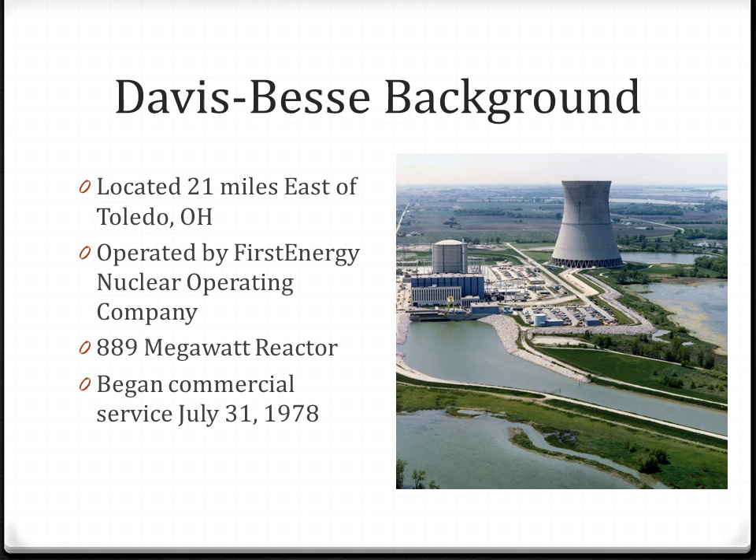Davis-Besse discovered borated primary water had leaked through stress corrosion cracks in the wall of an A600 nozzle. They also discovered boric acid wastage on top of the reactor vessel head. Approximately 900 pounds of boric acid residue had leaked out and resided on top of the head. Corrosion had already occurred through 6.5 inches of steel, and only a third of an inch of stainless steel cladding remained as a pressure boundary, keeping 2,100 psi reactor coolant from leaking out of the reactor vessel. The stainless steel cladding did exhibit plastic deformation in the form of a 1/8 inch bulge.

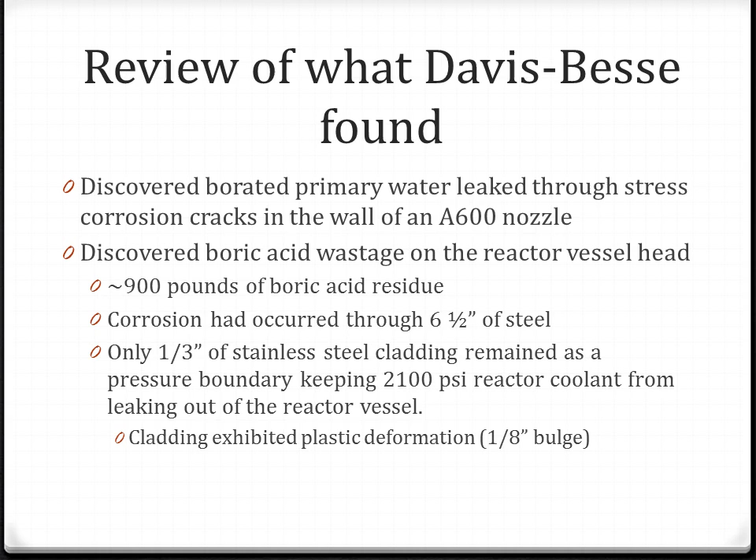The damage at Davis-Besse can be traced back to the cracks in the nozzle caused by stress corrosion cracking of the Inconel A600 nozzle. The crack initiation began around 1990, and the leakage from the nozzle began around 1995. The cracks allowed borated primary water to leak through the cracks and come in contact with the low alloy steel reactor vessel head. The boric acid wastage of the low alloy steel led to the creation of a large cavity approximately 6.5 inches deep and 5 inches wide in the reactor vessel head.

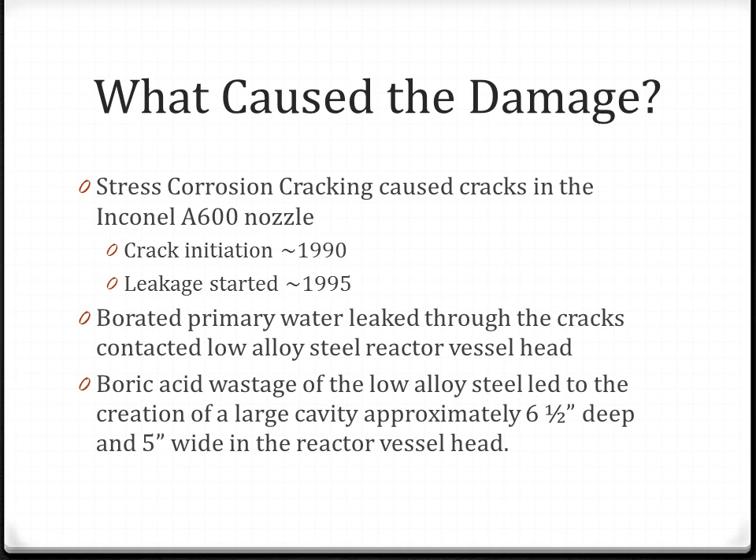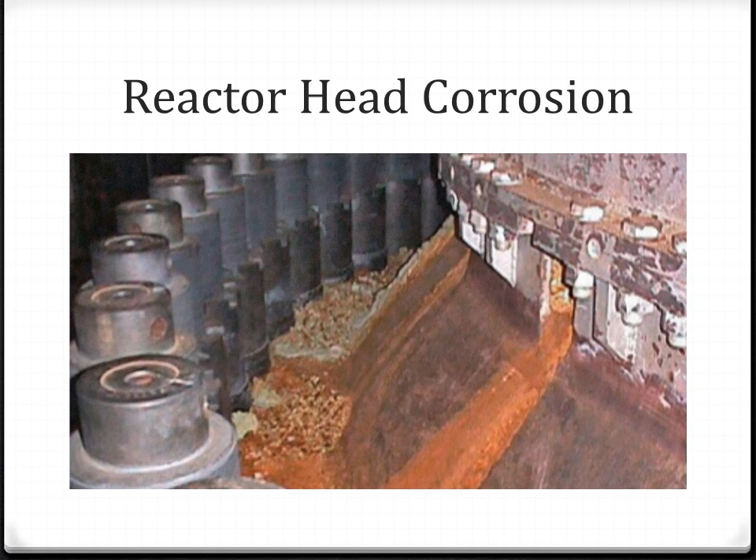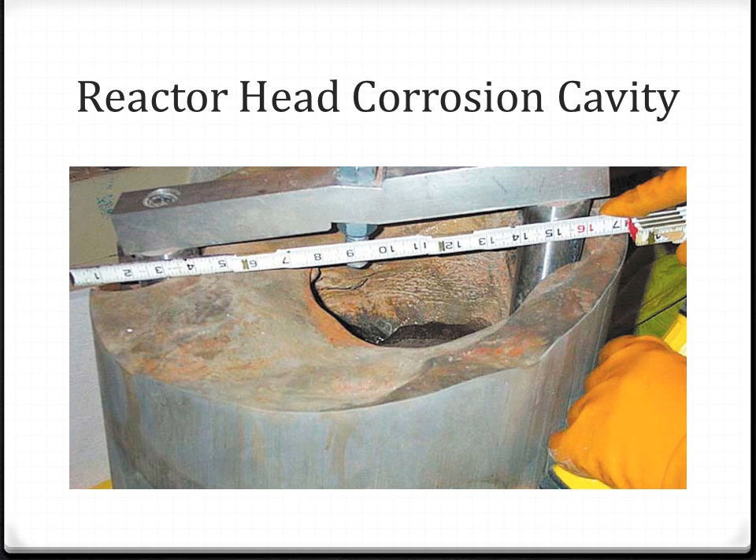This is a view of the top of the reactor vessel head at Davis-Besse. In this picture you can see the boric acid deposits and corrosion on top of the reactor vessel head. This is a picture of a 17-inch diameter section removed from the Davis-Besse reactor vessel head, showing the boric acid wastage around nozzle 3 toward nozzle 11.

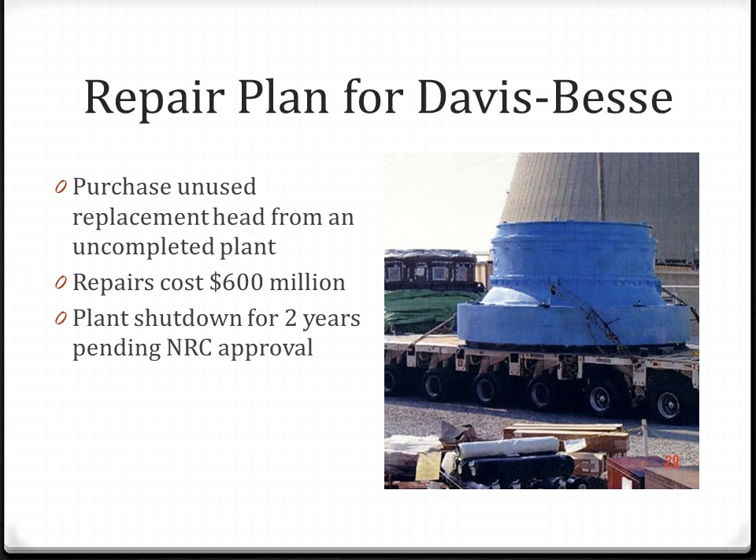Davis-Besse was left with no other option but to replace the damaged reactor vessel head. The plant had to purchase a replacement head from Midland, an uncompleted reactor plant. The total cost of the repairs added up to $600 million, and the plant was shut down for 2 years pending approval from the Nuclear Regulatory Commission. Although the repairs did not take 2 years, Davis-Besse had to prove that they could operate the plant safely.

Could Davis-Besse have prevented this incident? First off, these were good engineers, doing the best that they could with the information they had at hand. Although this incident shares a lot of the same factors that led to the devastating Challenger disaster in 1986, the engineers at Davis-Besse did not have nearly as much information as the personnel at NASA had.

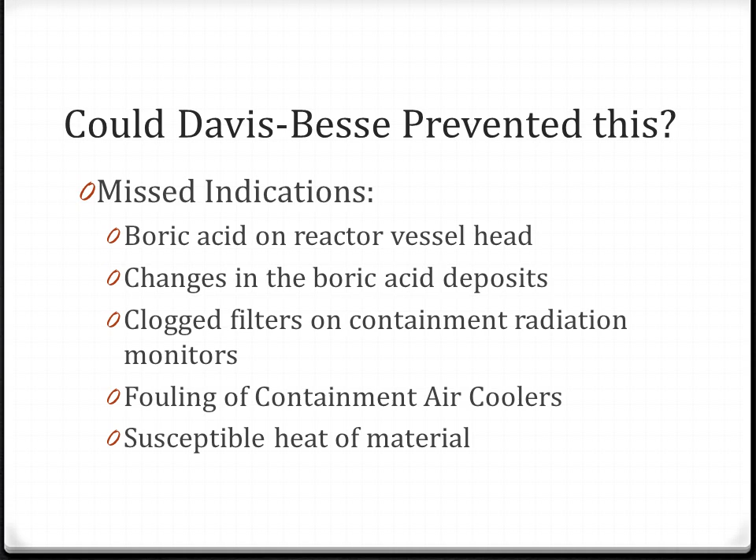The engineers did miss indications such as the amount of boric acid on the reactor vessel head, the changes in the boric acid deposits, the frequency at which containment radiation monitors were becoming clogged, and that the nozzle was made from a very susceptible heat of material. With these missed indications, I'll also be discussing the normalization of deviance, or gradual process through which unacceptable practice or standards become acceptable.

The first missed indication that Davis-Besse had that a bigger problem was occurring at their plant was the boric acid deposits on the reactor vessel head. Boric acid deposits were first discovered in the early 1990s and were cleaned over the next couple of years. Davis-Besse self-identified the source of these deposits as leaking flanges. All flange gaskets in the plant were replaced in 1996, and Davis-Besse did not question other possible sources when the deposits continued after 1996.

Furthermore, they knew that the access for visual inspection of the reactor vessel head was limited due to the blocked inspection ports called mouse holes, and it was determined by management that the cleanup could be pushed until 2002, even with concerns from engineers. It was during the next shutdown in February of 2002 that Davis-Besse discovered 900 pounds of boric acid deposited on the reactor vessel head.

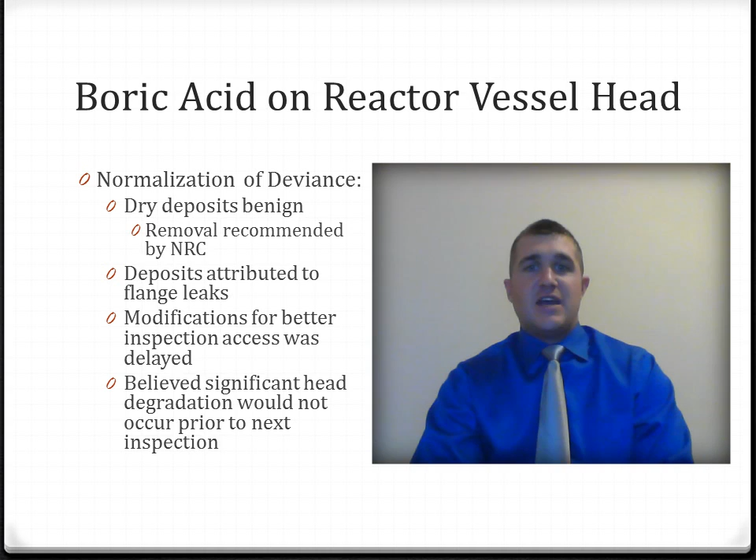The second indication that was missed by Davis-Besse was the observed changes in the boric acid deposits. Even though the deposits changed from powder to hard deposits and contained some regions of rust-colored deposits, the plant still decided to continue operations.

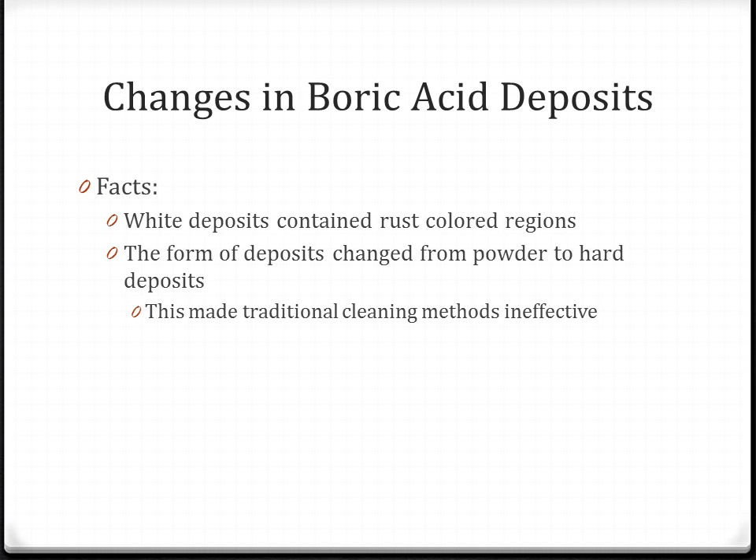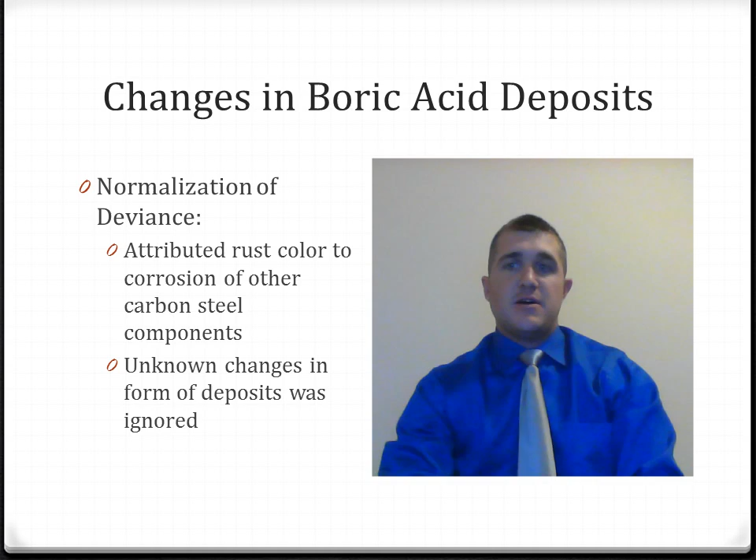The third missed indication in this incident is the clogged filters on containment radiation monitors. The cleaning frequency of these filters increased from once every 30 days to once every 3 days. During cleaning, Davis-Besse also discovered that rust-colored deposits were on the filters. The clogging of the filters continued after the plant moved the monitors away from the exhaust fans and also added HEPA filters.

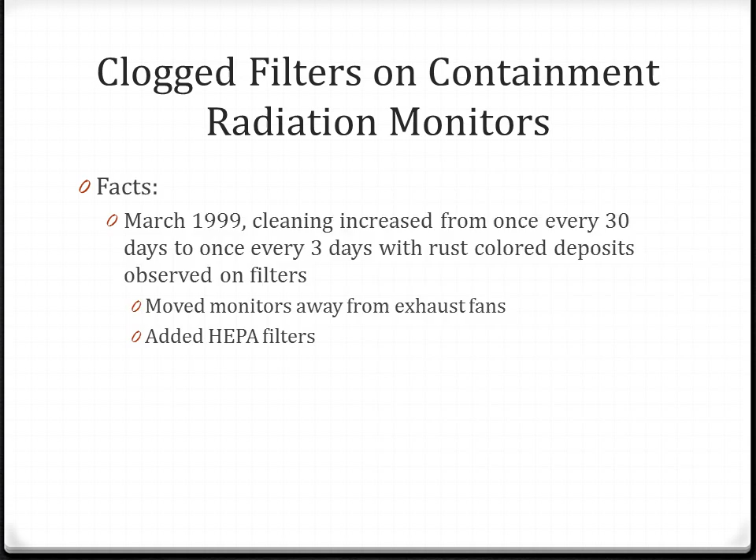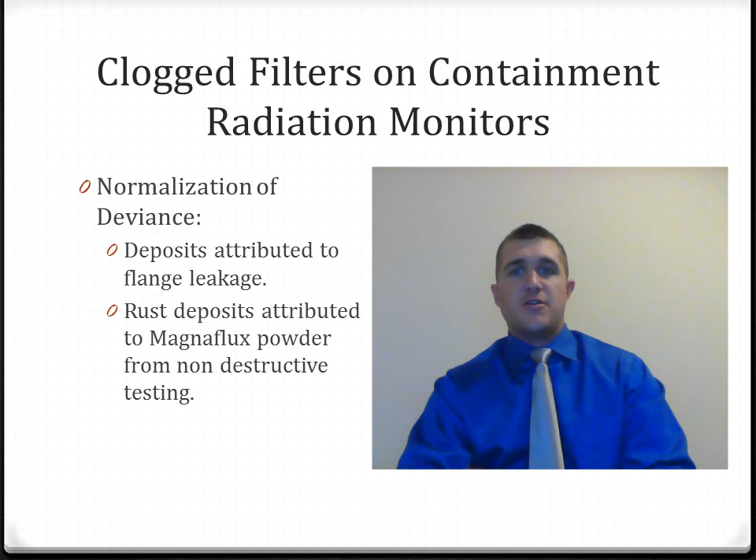The fourth missed indication was the fouling of containment air coolers. Original cleaning schedule prior to November of 1998 was once per refueling outage. Cleaning of the air coolers then increased to 17 cleanings over the course of the next 7 months. After repairs were made to the air coolers, cleaning went down to once per month. Davis-Besse removed approximately 75 gallons of wet boric acid from the system during these repairs and still attributed this to a flange leak. They attributed this to a flange leak due to historical experience in commercial plants.

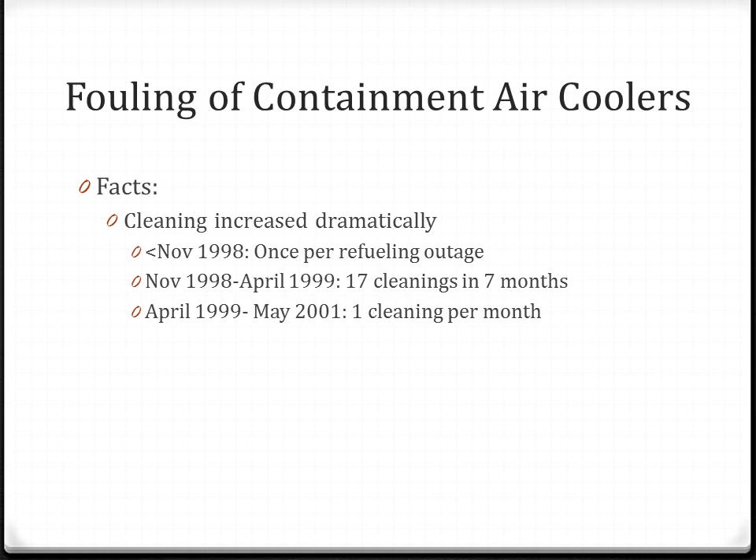Engineers at Davis-Besse still attributed the clogging of the air coolers to leaking flanges even though all the flange gaskets had been replaced in 1996. They also did not question the rust deposits found and rust on other components in the containment vessel. The changes in the cleaning schedule were likely due to changes in the nozzle crack size. Engineers again lacked a questioning attitude with this missed indication.

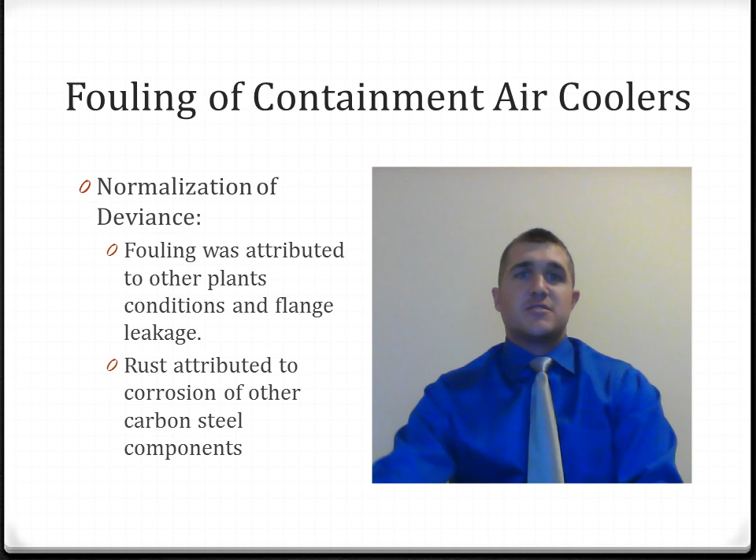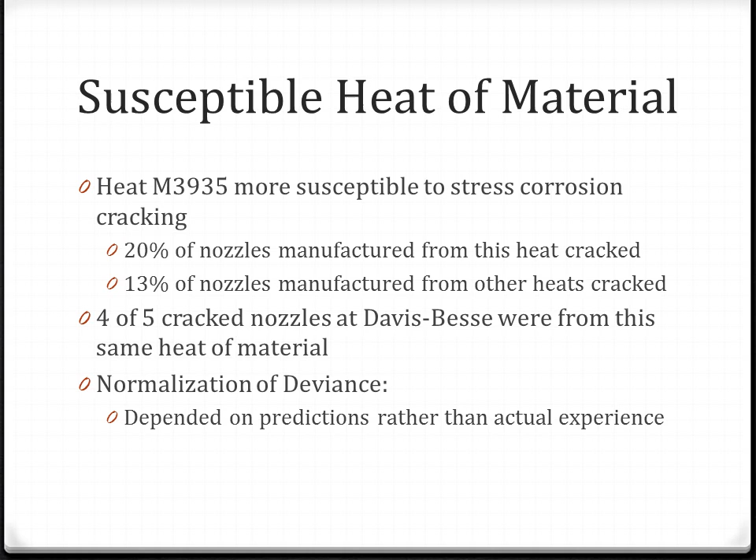The final missed indication was the susceptible heat of material used in the manufacturing of the nozzles. Some of the nozzles at Davis-Besse were manufactured from heat M3935, which was more susceptible to stress corrosion cracking. 20% of the nozzles manufactured from this heat cracked compared to an average of 13% from other heats. The normalization of deviance from this indication is that engineers depended on predictions rather than actual experience.

There are also other contributing causes to this incident. Management monitoring did not identify problems in changing conditions in the plant. There was inappropriate elevation of concerns. They lacked independent oversight in the plant. Assessment of all reasonable potential causes were not systematically proven or disproven until the cause was identified. Operational pressures influenced technical decisions, and assumptions for technical decisions were not verified by direct inspection.

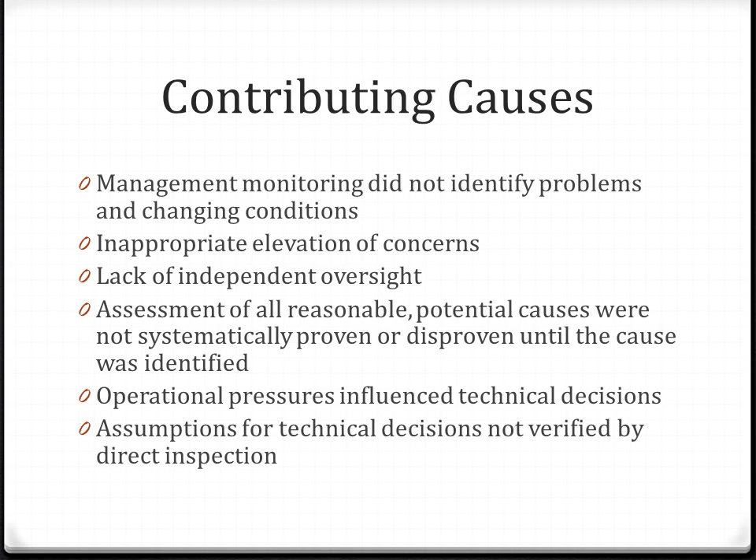You can compare some of the mistakes Davis-Besse made to the mistakes NASA made with the Space Shuttle Challenger disaster on January 28, 1986. Management at NASA was concerned with maintaining the operational schedule and did not want to delay the launch even though engineers expressed their concerns about the O-ring failure in colder temperatures. Management at NASA also did not believe the possible O-ring failure would cause any significant damage.

Davis-Besse made similar mistakes. Management at Davis-Besse was more concerned with getting back to production and did not want to delay production for the cleanup of the boric acid deposits, even though engineers had expressed concerns of the need to finish cleaning these deposits. Davis-Besse chose to delay the cleaning because they did not believe significant damage could occur to the reactor vessel head prior to the next inspection.

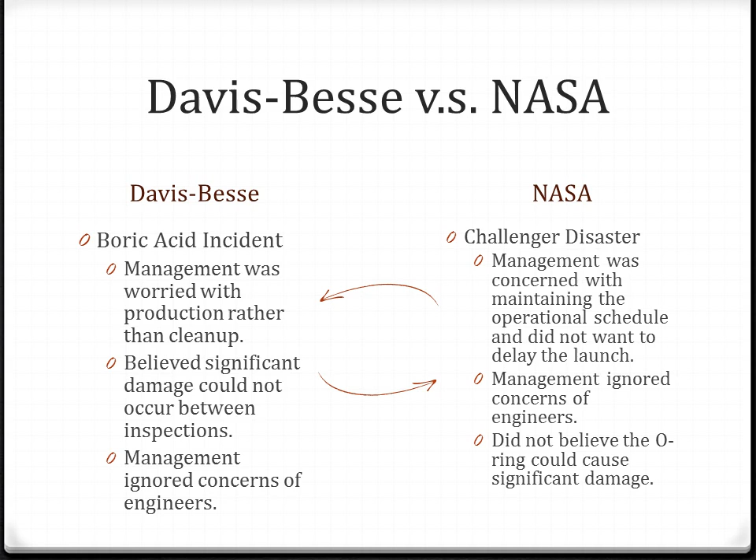The Davis-Besse incident brought about many changes with how the Nuclear Regulatory Commission conducted business. You can see these changes in the inspection program, the integration and assessment of performance data, communications, this includes the plant reporting process and how the Nuclear Regulatory Commission disseminates information, and also in the licensing process guidance.

Davis-Besse self-identified the following in the root cause analysis report they released on April 15, 2002. Analysis identified that several opportunities for identification of and scoping the significance of field conditions were missed when reviewed collectively. The relating of independent but common causal data was missed at all levels of the organization.